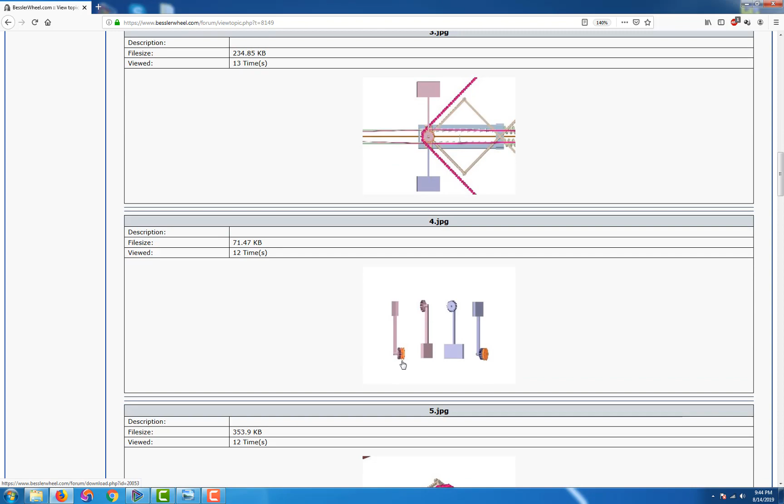So what we have here, okay, let's start with A. A is the chain, and as you can see we have dots on one side, only one side. So why is this one side? Let me find one. Let's see this one. So we have the chain, and the weights are on the same side of the chain.

So the reason for that is that when the wheel starts to spin, let's say clockwise, it moves the weights in the same direction. That's the meaning of the symbol, that the chain moves the weights in the same direction.

Now B, this is the belt. On the belt we have the weights on one side, then the other, on the left, then on the right, and so on. And we have this nice split here, right? So we have the belt. It's also pink, so yeah. So let's say the wheel spins clockwise.

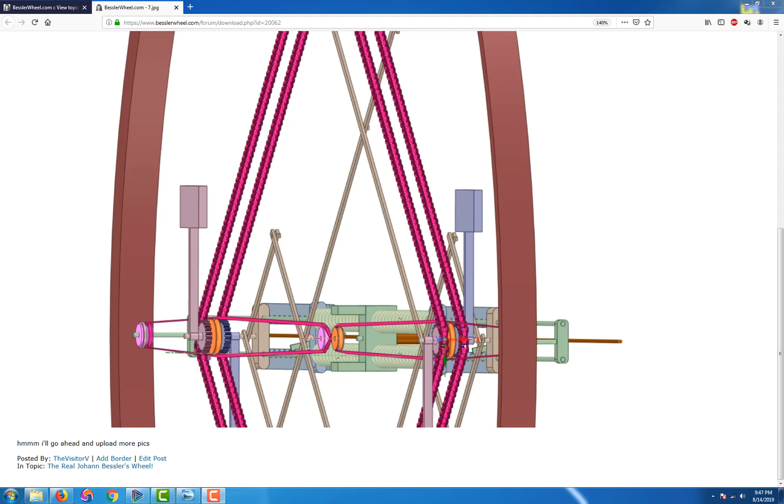Wow, I need a moment. Okay, sorry, I got distracted for a bit.

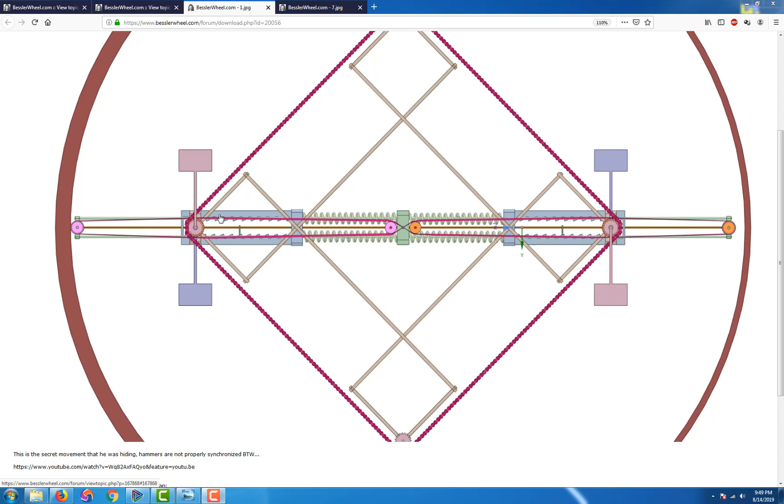So the belt, I found this picture, it's much better. So here what I've done: let's say the bar is going this way, right? So it spins the blue hammers, let's say both of them this way, but it spins the other hammer in the opposite direction because they crisscross in the middle. I'll find a better picture. Actually, this one is okay.

So these orange pulleys are connected on one side of the wheel with one hammer, and let's say the left side is connected to the blue hammers, and the right side is connected to the pink hammers, or whatever color this is, pinkish. So this is what the belt does.

So now we have the C and D drawings, which represent the 4 hammers, and actually the 4 hammers and the 2 weights that they are moving, not 4 weights. 4 hammers, 2 weights. These are the handlebars for the pantograph or storksbills or whatever.

So here is something interesting. This toy, if we go with 1 hammer, we flip it back and forth, one goes down and one goes up, but that's just a section of the movement. Also, imagine this, that now they're both in this point and they're in equilibrium. Now one goes down and the other one goes up, but they will also meet on the exterior in the same position from this middle if they continue swinging. They meet here and they meet here, right, but they're always out of phase 180 degrees.

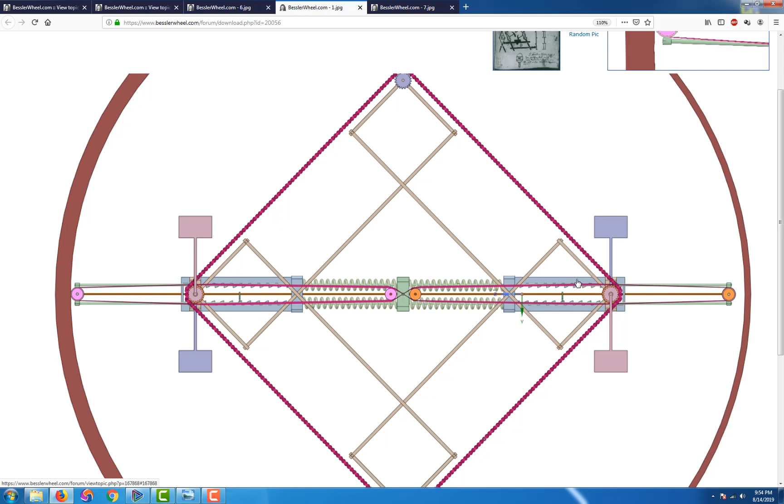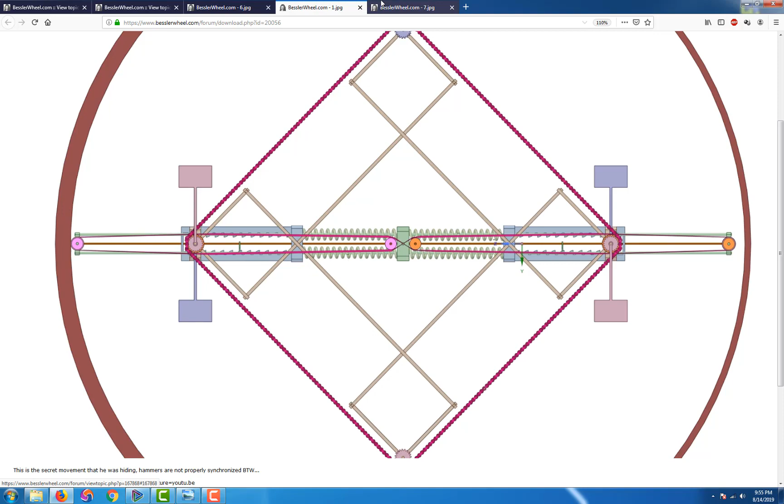The blue weights are connected among themselves through these linkages. Also, the linkage is really important. It cannot be replaced with anything simple, because what the linkage also does, it always keeps the chain stretched. If the chain is not stretched, you cannot keep the hammers in balance. And also there's one more thing that the pantograph does. It's not here. Okay, there it is.

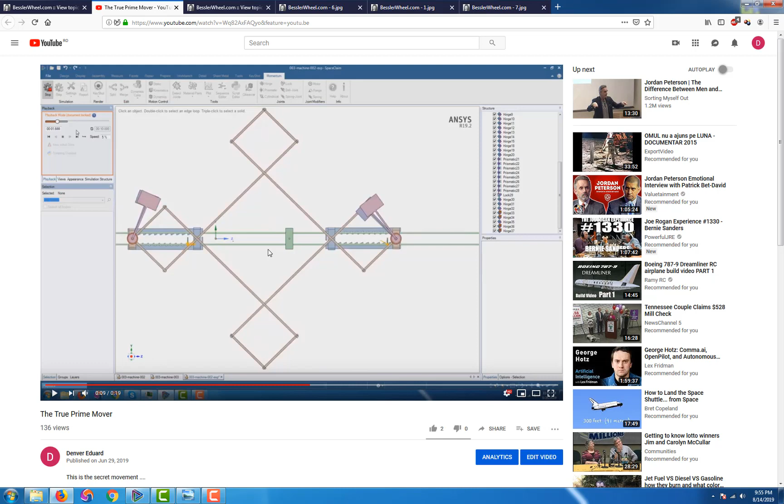So as you will notice here, one weight moves, then the other one, then the other one, then the other one. So this entire structure is to keep the chain stretched while only one side of the wheel moves, and then is followed by the other one. You can't do it any other way that I know, at least not with chains. So what else? The linkages, well, I've explained what the linkages are for.

And the spinning, right? This is what it's symbolizing, that it's spinning, and the more it spins, it flips itself up in the upper position. But this is not a component used in the machine. These are the 5 components: the chain, the belt, the hammers, the weights, and the linkages. This is the machine that you've all been looking for. Also, I was looking for a long time.